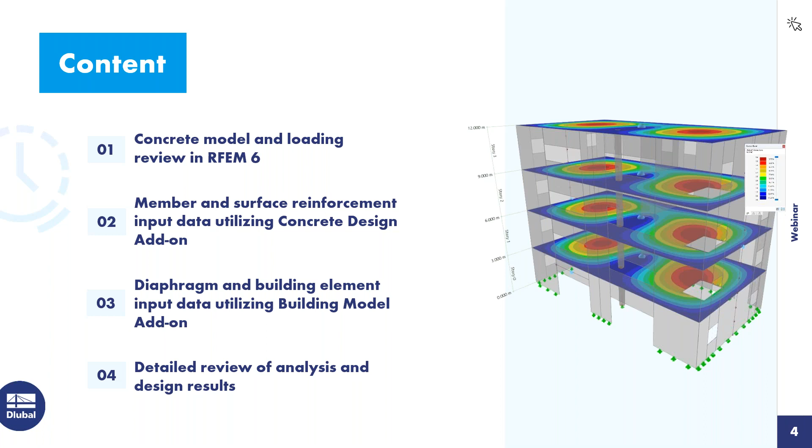We'll also be taking advantage of the new add-on within RFEM 6 called the building model. So this allows us to define building-specific elements such as diaphragms, spandrels, and shear walls. And finally, throughout the presentation, we will be running both the analysis and design and taking a look at the results in more detail. So we'll immediately begin within our main program, RFEM 6 here.

As you can see, I've taken the liberty to already model our concrete structure. But if we visit our base data by right-clicking on the model name, when you begin a new file, you will give it a model name. The type of model will be in a 3D environment, for example, today. And under the second tab are our various add-ons.

So RFEM is responsible for the full analysis of our structure. But if we wanted to take this a step further, and in particular today, to carry out the concrete design according to the CSA standard, then we would need to activate here that concrete design add-on.

Now, under this third tab, you can see here that we will generate the load combinations automatically according to the NBC that is selected here from our dropdown, but many other international standards are also available. We also will be utilizing the 2020 standard.

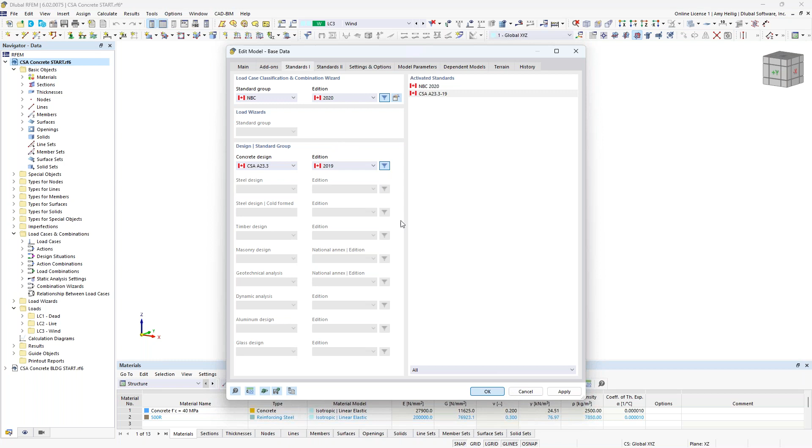As far as the concrete design, we will be carrying out the design according to the CSA A23.3-2019, but if you do have access to the concrete design add-on, you will also be able to run your design according to the ACI, the Eurocode, or other international standards offered. So once this information is input, we can go ahead and jump back into the main program RFEM here to review the model input data.

And we'll begin with our materials. So over on the left-hand side, you can see that the concrete compressive strength that I'll be utilizing for all of our elements today will be 40 MPa. If I double click on this material, I wanted to point out that the material type is set to concrete. And when we do this, we have an additional tab here to specify the creep and shrinkage properties of the material as well. So this will come into play a little bit later on with the long-term deflection.

Now for our example today, I'm going to leave these options turned off, but just keep this in mind for those specific concrete materials. I also have here defined the reinforcing steel material, 500R. This will come into play also later on as well with our reinforcement input data for our elements.

So in addition to the materials, we also have our cross sections. You can see that I actually only have one cross section defined for our members, which are the columns kind of running up through the center here of our structure. And double clicking on these particular members, you can see that the member type is set to beam. So this would be any standard beam or column element.

What also may be common with concrete design is the member type rib. So we can actually place a beam element below the depth of the slab here, integrate the internal forces to design this as a T-beam. Now, I won't be utilizing this type of member in today's example, but in the previously recorded webinar for ACI 318 design, I do go more into depth with the member type rib as well as the design, so you can refer to it there.

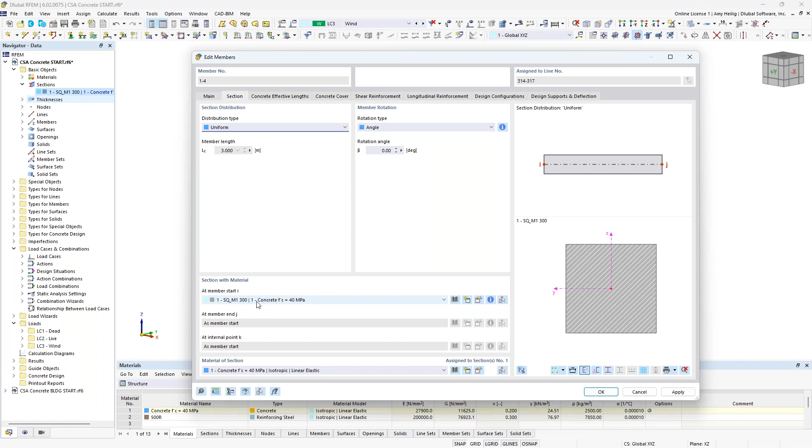For today, just using the standard beam type for our columns. We also have here the cross section and the material that are assigned to the member. You can see this is just a standard 300 millimeter by 300 millimeter with that same concrete compressive strength assigned as the material.

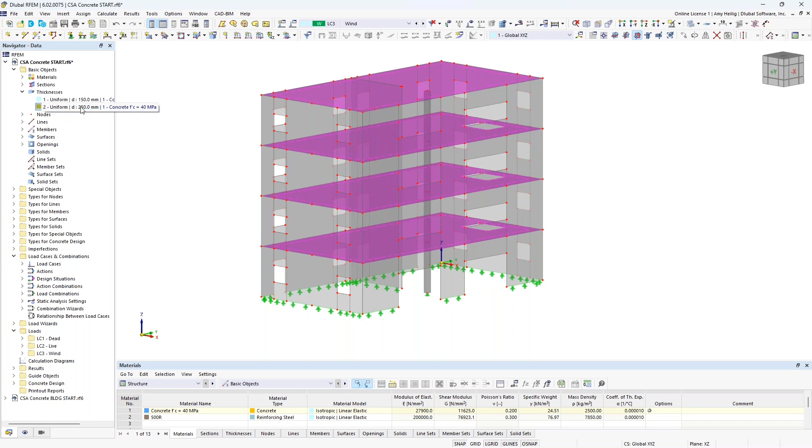As far as our surfaces, we have two different thicknesses assigned to these surface elements. For our walls, they are all utilizing a 150 millimeter thick definition type here. And then as far as our floor or slab elements, these are going to be slightly thicker at 250 millimeters.

With the modeling of our surfaces, you'll notice that all of these segments here for spandrels and shear walls are modeled as individual surface elements. This gives a little bit better output when it comes to the building model that we'll visit later today in our example, but this is in contrast to modeling one continuous surface and inputting standard openings as you see up here in our toolbar.

So again, just a little bit better behavior when we're talking about the building model add-on, but we are working in the next several weeks to optimize this so that the building model can also handle standard surfaces with standard openings. But for today, just notice that all of these are individual surface elements that are modeled around the openings themselves.

And finally, you will see down here at the bottom our supports defined. So just a standard pin type application at the bottom of our 2D surfaces with a line support. This pin support will be applied at every FE mesh element at the base of these walls. We also have a single nodal support here at the base of our column.

So now that we have reviewed the general information for our model, I want to get into the loading. We'll go ahead and access our load cases and combinations dialog box. As you can see under the base data, we have the same information that we defined within the dialog box we previously saw, where we're going to generate those load combinations automatically according to the NBC 2020. When this checkbox is checked, we will generate those load combinations automatically. Alternatively, you can uncheck this option to manually generate the load combinations instead.

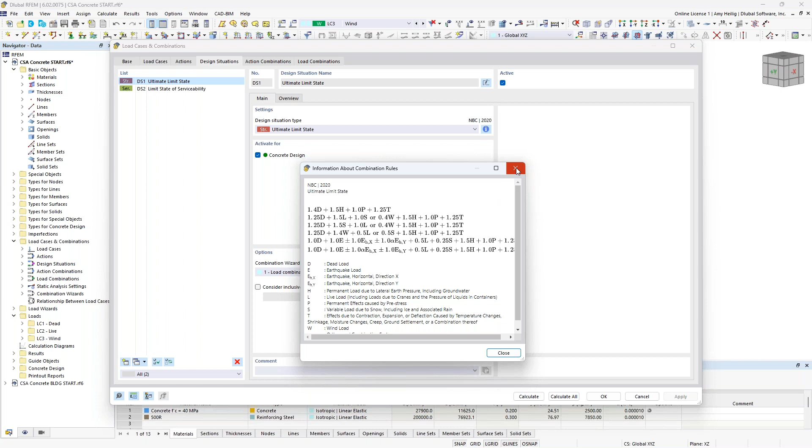A design situation is nothing more than grouping together the factored load combinations according to the NBC standard for this first design situation. We can review this data directly from the NBC standard with this info button. The unfactored load combinations are part of this second design situation. Again, we can reference the code here. All load combinations will be carried out according to a second order analysis.

And finally, we jump to our load combinations tab. You can see the individual load combinations listed out, and our factored load combinations in red belong to that first design situation, and our unfactored load combinations belong to the second serviceability design situation.

Now, before we move back to the RFEM model, I want to quickly explain how we can take into consideration the I-crack factor requirements from the CSA standard, in particular from clause 10.14.1.2. This is a requirement from the standard that we apply this crack factor to the stiffness of our elements within our concrete model. The problem is that when we draw this model, this is not automatically taken into consideration. Rather, we need to give that definition type directly under the load cases and combinations.

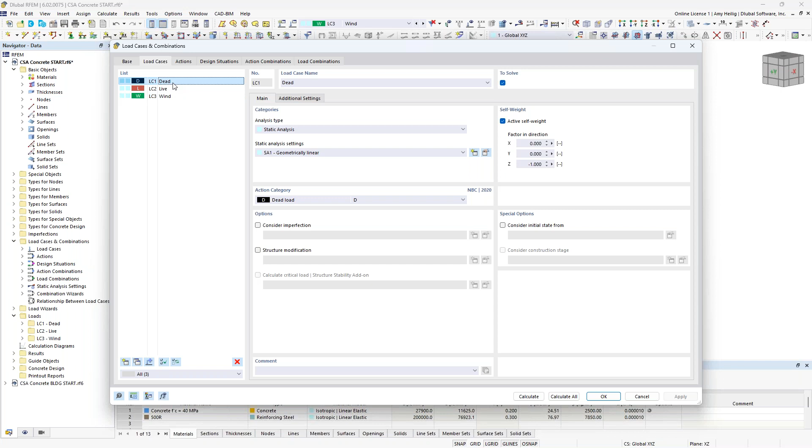So we'll begin back here under the load cases where we have the structure modification checkbox. What I'm going to do is create a new definition type for both our members and our surfaces. Now we get two additional tabs up here at the top. You'll notice under the member modification, I want to create a new definition type here.

And we have an additional drop-down box where we can directly select the CSA A23.3. And with this, we're going to refer directly to table 10.14.1.2. And we have 2 different component types, columns and beams. Well, for today's example, we only have columns available in the model. So the I crack factor directly from the CSA standard, as you can see here for bending stiffness, will be

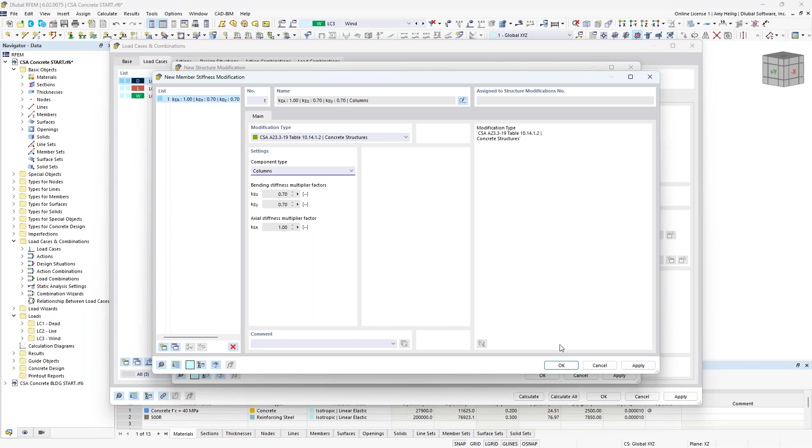applied to those members. So once we create the definition type, I do need to graphically select the members here that I would like to apply these to. So I'm just going to choose the 4 column elements here, and you can see the numbers 1 through 4 are now populated within this table.

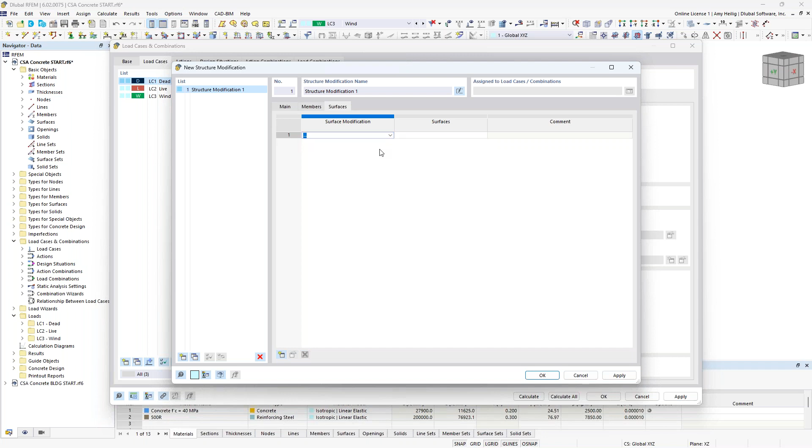We do the exact same thing with our surfaces tab. I use my drop-down box here to create a new stiffness modification. I utilize my drop-down box here to yet again select the CSA standard. And under the component types, we have 3 different options, and we'll begin with the walls uncracked. So we have the relevant I crack factor that will be applied to our 2D surfaces for our wall elements in bending and torsion. I click OK, and now I need to graphically select the wall elements.

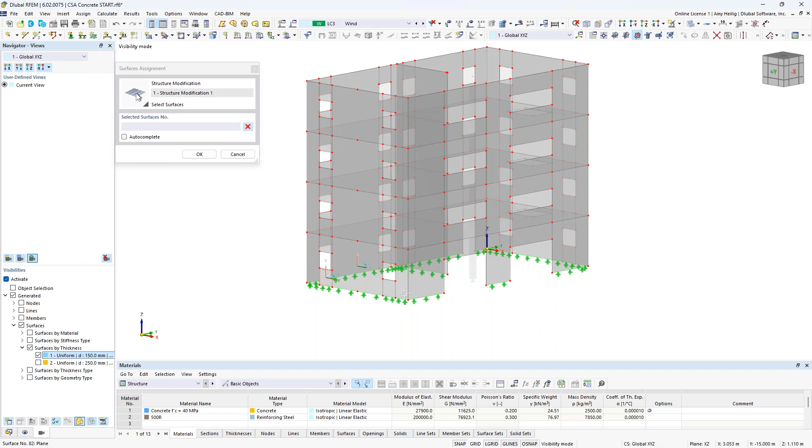I could individually select these or use my selection box graphically, but another easy method is to take advantage of the navigator view options here, where you can see that we can select various elements. And we'll begin with our surfaces, where I can select all surfaces graphically by their thickness. So I can select all surfaces that are 150 millimeters thick, which will essentially be all of my wall elements. I graphically select them, I click OK, and now those values are input into this table.

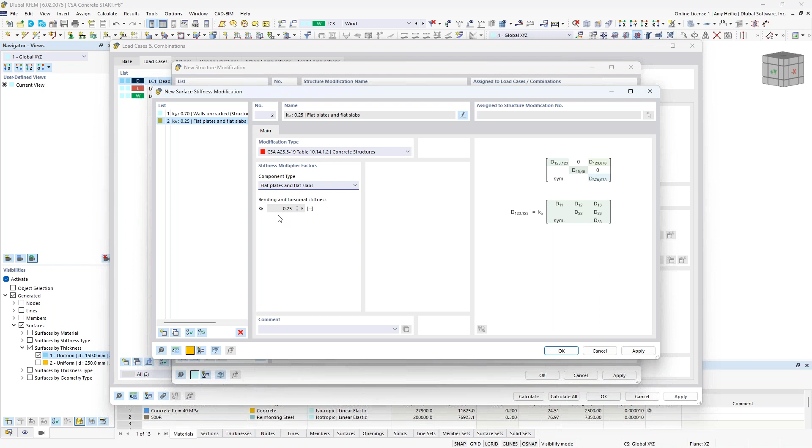Now we lastly need to create one more stiffness modification. We're going to use our drop-down for the CSA standard to select flat plates and flat slabs. The I crack factor is updated from the code to 0.25. I click OK, and now I need to graphically select the members that this will be applied to. So I'm going to modify my views here to the surfaces that are 250 millimeters thick, which are all of my floor slabs. I select those, I click OK, and now this information is complete.

So now that we have this structure modification definition, we want to apply this to the additional load cases here. So I can select both with my shift key and simply activate this modification yet again. But it's not enough to only apply it to the load cases. We also need to apply it to our load combinations. The easiest way to do this is to go to the design situations themselves.

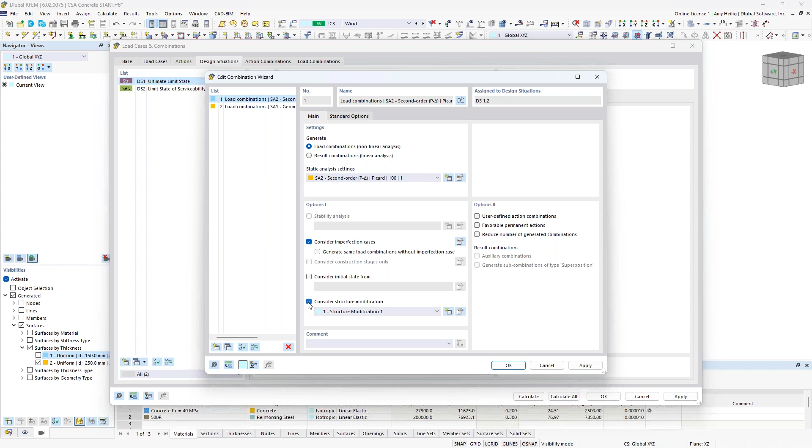And I had mentioned how we're automatically running a second order analysis with the combination wizard settings down here at the bottom. Well, if we go into the detail settings for this, we also have that exact same checkbox that we can turn on here for the design situation, which will in turn affect the load combinations. But I'd really like to apply this I crack factor only to my factored load combinations for the ultimate limit state. For my serviceability, I really don't want to apply the I crack factors.

Instead, what we refer to for topics like deflections under serviceability is the effective moment of inertia. And this is called out in clause 9.8.2.3 within the CSA standard. Well, when you do the design within the concrete design add-on, the effective moment of inertia will automatically be calculated. So I want to turn off the I crack factors for my unfactored load combinations. A very easy way to do this is to make a copy of my existing definition type and to simply turn that off with the checkbox option.

So now with my factored load combinations, I leave this with my first definition type, but for my unfactored, I'm going to use my drop-down box to select that third definition type. If we jump to the load combinations, we now see our factored load combinations here with the structure modification turned on, and our unfactored load combinations will have this option turned off.

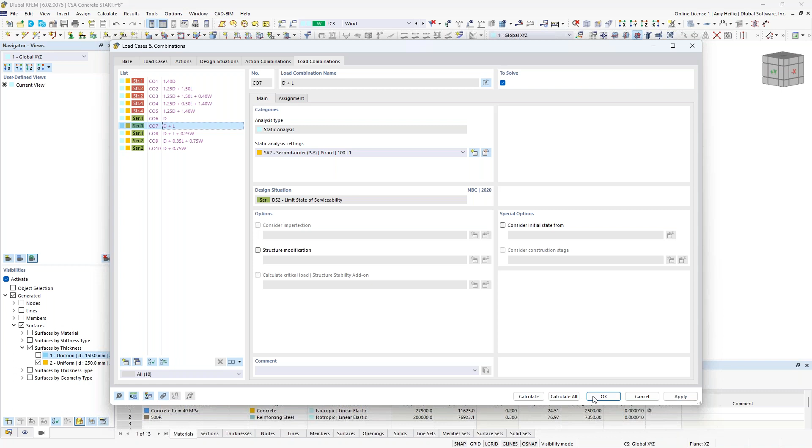Okay, so now that we are complete with the load cases, the load combinations, we've applied the I crack factor requirements from the code, I want to go back to the RFEM model here just to take a look at the display of our loads. So again, very simple application for today. For our dead load, you'll notice here that I just have simple surface loads applied at each floor level of 3 kilonewtons per meter squared.

When we look at the live load, exact same concept, and you'll also see here that within RFEM 6, we can right click on these loads and decrease the size of them graphically with this slider tool. But I've essentially applied these live loads at the interior floors only.

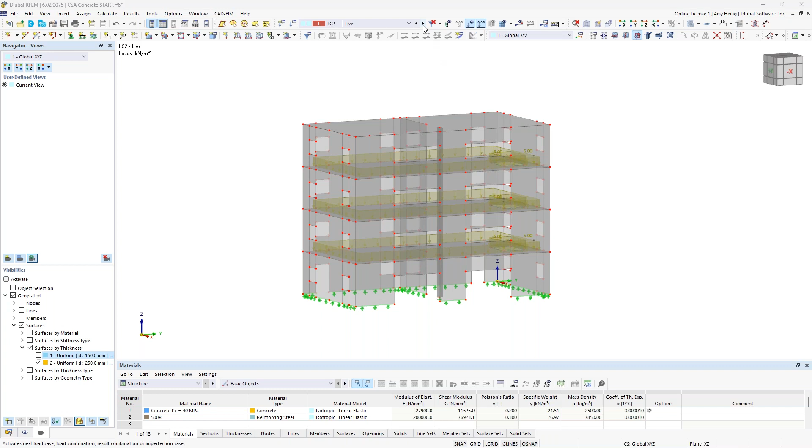And finally, we also have here a wind load. Again, very basic loading application for today. We have 2 kilonewtons per meter squared in the global X direction, and then 1 kilonewton per meter squared as a suction force on the other side. I recognize realistically, we'd probably have additional suction forces on the roof, and we'd probably also want to consider these openings and apply them as line loads around the edges of our door and window openings.

But for today, just sticking with this simple application. Now that we have our 3 load cases defined with the loading applied to this structure, we can jump down to any one of these load combinations and cycle through them to see the loads applied on the structure simultaneously, taking into consideration the load factors as well.

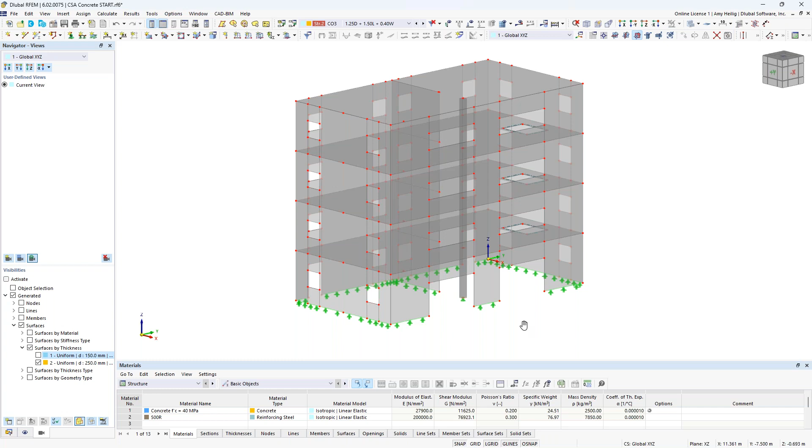All right, so now we have reviewed the loading. We are finally ready to input in the reinforcement for some of our elements specific to the CSA standard. We will begin here with the reinforcement input of our columns.

So I'll go ahead and hold down my control key to create a user-defined visibility for only these members. When I double click on all 4 of members, numbers 1 through 4, you'll notice that we have the design properties turned on here. This is just telling the program that not only do we want to carry out the analysis, but we want to take it a step further to actually design these in the concrete design add-on. We have all the available tabs up here at the top, but notice when I uncheck these, all of these tabs actually disappear, just telling the program I only want to carry out the analysis with the concrete material, no reinforcement input.

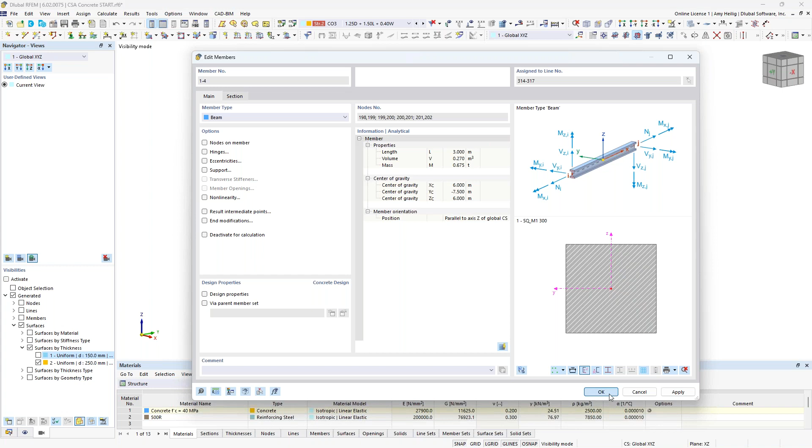So what we, of course, will do is input the reinforcement here, but assuming that we want to have the same reinforcement for all of these columns at all levels, I certainly could go into each individual member and input in this reinforcement, but alternatively, we can take advantage of what we call the member representative.

So I'm going to access that same base data dialog box by right-clicking on the model name and jumping to the settings and options where I can turn on the member representatives checkbox. What this is going to do is group together members that are really similar or identical in most ways, including materials, cross sections, the length. So now when I click OK, what you'll notice here is that I get a new option within my navigator called Member Representative, and this will group together these 4 identical members.

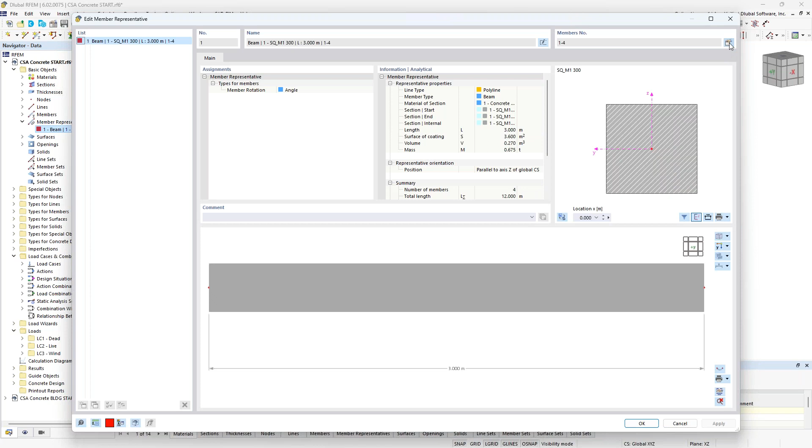Double clicking on the member representative to open up this dialog box, you can see that it includes members 1 through 4. And if I go into the edit members setting up here in the upper right corner, we're back into the same dialog box. I can turn on the design properties for those additional tabs here, but again, instead of individually inputting in this reinforcement, I'm going to click OK, and all of these exact same tabs will be available in the member representative.

So this way, if I need to make any modifications to this reinforcement, I can do it through the member representative, which will in turn make those same changes to members 1 through 4. So we'll begin by working through these tabs up here at the top. The first one, the concrete effective lengths.

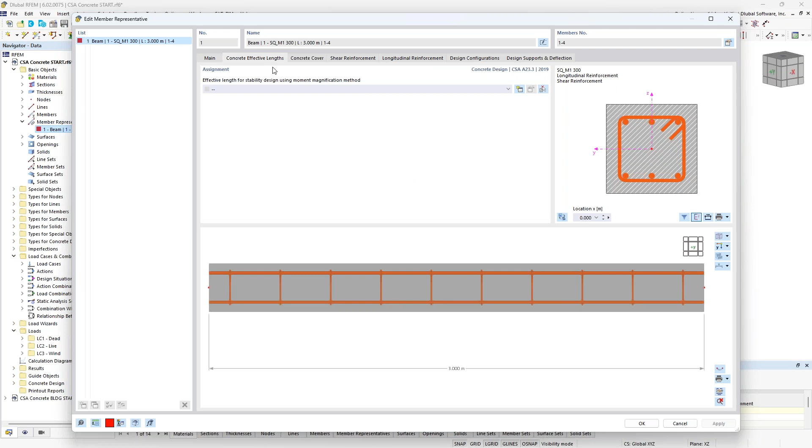This is only if you're going to carry out the moment magnification method, and because we are running a second order analysis, this is not required. Moment magnification is required for first order analysis. So essentially, we don't need to do anything within this particular tab, and we can leave it empty and move on to the next. We have here the concrete cover.

So I'm going to specify 30 millimeters for my concrete cover for these columns. Under the shear reinforcement, this is where I'm going to specify my stirrups.

So under the first dropdown, I choose the stirrup type, and I'm going to go ahead and choose the default first option here. The material is also set. I already have this reinforcing material defined within the model, so I can just simply select it from my drop-down box. But if we did not have that reinforcing material available to us, we can click on the 3 dots here.

This will bring up our material dialog box where we can access our material database. Utilizing the filters over on the left, we can filter to Canada, filter to the material type set to reinforcing steel, the CSA standard, and then we have these available reinforcement materials from the library directly.

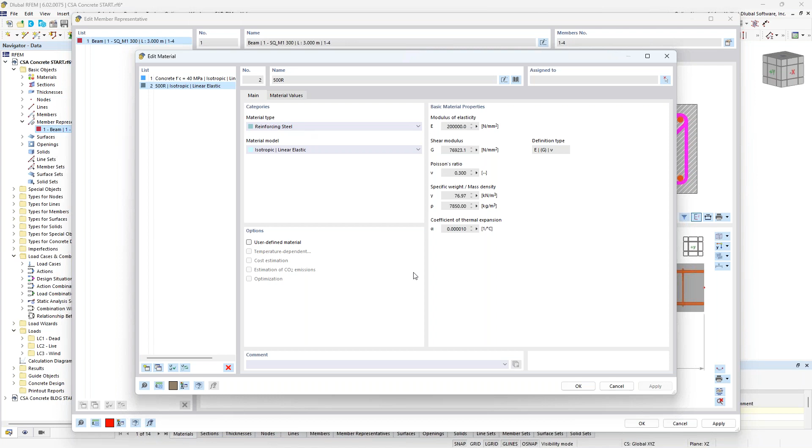If we choose one of these reinforcement materials and we want to make some modifications, we can always choose the user-defined material option checkbox that will allow us to make modifications for a user-defined material. For today, we already have this 500R defined for my reinforcing steel, so we'll go ahead and utilize that.

Now I want to select within this drop-down box the bar diameter, so we'll go ahead and select the number 10s here that are available with this first option. I specify the stirrup spacing such as 0.3 meters, and the number of bars will be set to 10. Now notice that the graphical display down here at the bottom will go ahead and update as I input in this information.

Now you do not have to set the same uniform spacing and type of rebar across the entire member length. It might be very common for beams, for example, to have maybe more shear reinforcement at the member ends versus the middle. We can simply create new definition types with this button here, and then we can specify exactly the start and the end of the shear reinforcement definition. But for today, for our column, we're leaving this as uniform spacing with those number 10 bars.

Moving on to longitudinal reinforcement. You can see by default, the program has set this to symmetrical, which might be more common for a beam. For a column, we want to choose the drop-down option, uniformly surrounding.

That 500R material will be selected here. We have a couple checkboxes to place the longitudinal reinforcement in the corners. This is really more applicable for T-beams. You can see that the reinforcement is already placed in the corners, so nothing to do with both of these checkboxes. We specify the number of bars, 4, and then we will also set the bar size within our dropdown.

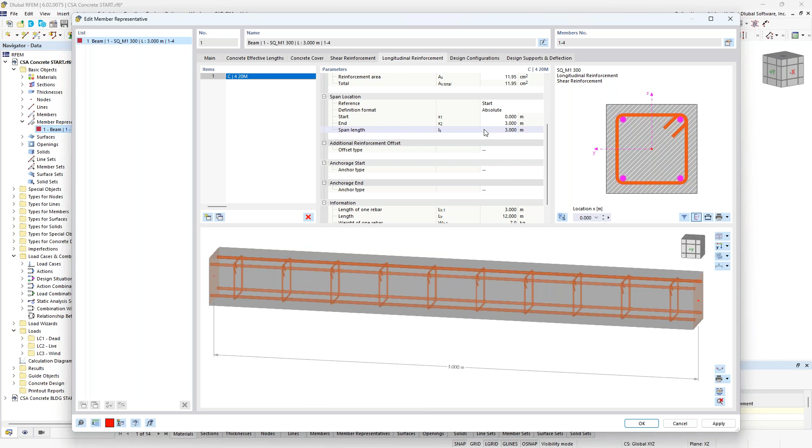So now we have finished the reinforcement input. We jump now to the design configurations tab, and we have here 2 configurations. The first is the ultimate.

So we go ahead and take a look at the default settings here. This is going to be information that is specific to the ultimate limit state design for our members. You can see here all of the various options that we can turn on or off, or maybe we want to change values, or we want to choose a different method, whatever it may be. But also all of the code references for the most part are listed out here, so you'll easily be able to refer to the code to understand which setting belongs to which requirement here.

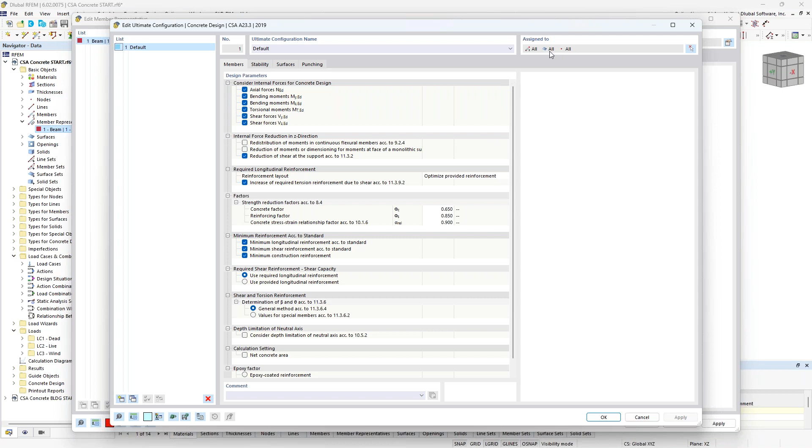We can also create additional configuration settings for different members. So currently we only have one definition type, but we can create a second definition type and assign it to different members and surfaces and so on.

Same concept for serviceability. If we look at the detail settings here for the default for the SLS design, we're going to see information specific to serviceability, such as the crack control according to clause 10.6.1. We also will check deflections of the members. You can see here the limiting deflection ratio for members that are supported at both ends versus a cantilever member.

We also have here the calculation of time-dependent deflections. So the default option here is to refer to clause 9.8.2.5, where we input in the duration of the load. And what this will simply do is to apply a deflection multiplier for the sustained loads to the instantaneous deflection. Well, this is certainly a very simple application here.

Alternatively, if we want to take into consideration creep and shrinkage from those material properties that I mentioned at the beginning of this example, this is going to be certainly a more theoretical and exact approach for creep and shrinkage. For this, we're going to take the approach from the ACI 435, as well as the same approach that's followed within the Eurocode, as there really is no specific requirements from the CSA on this topic. Now for today, we'll just leave this as the simplified time-dependent factor here.

So these are the various settings then with the serviceability and ultimate configuration settings that we'll utilize within that concrete design add-on. And finally, we have here the design supports and deflection. So when I don't do anything within this particular tab, the program is going to assume that this member is supported at the member start and the member end at exactly these points shown here.

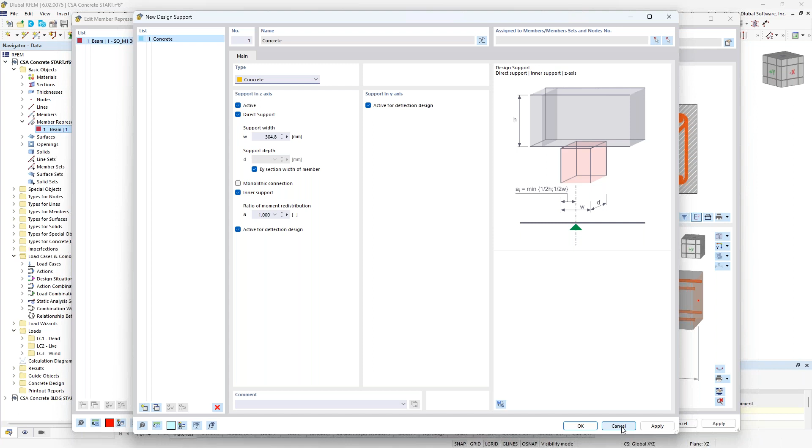So maybe not so applicable here with our columns. We'll just go ahead and leave this as default, where all forces are taken directly at the member ends.

Now that this information is input within our member representative, what you would typically see is the reinforcement shown here graphically. I'll turn this into wireframe view. You can see here the longitudinal and the shear reinforcement shown.

Now that we have the reinforcement for our concrete members, let's go ahead and cancel out this visibility and move on to the reinforcement of our slab.

I will begin with the slab shown here at the first floor, and we go ahead and double click on this element. You'll notice we have the exact same checkbox available here for our 2D surface elements. This is telling the program not only to carry out the analysis, but also to perform the design within the concrete design add-on.

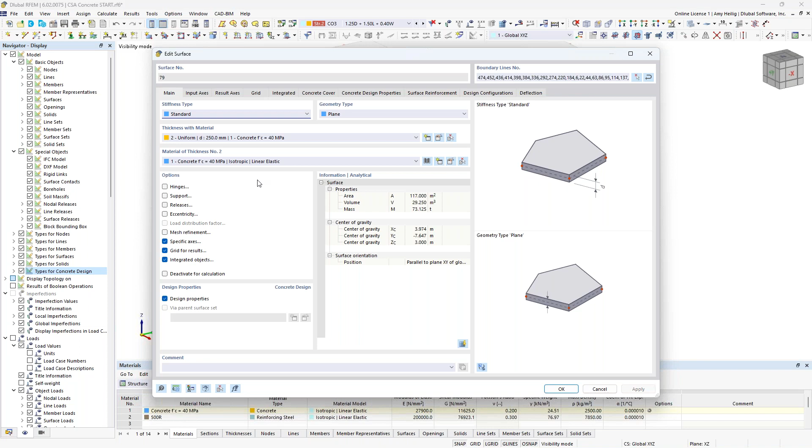So we will move through these tabs. We will start with the concrete cover, where we're going to increase the cover distance here to 40 millimeters at the slab top and the bottom.

The concrete design properties simply tell the program that when I define my first longitudinal reinforcement, which direction should this be related to in terms of the surface's local axes. The default here is the local x-axis.

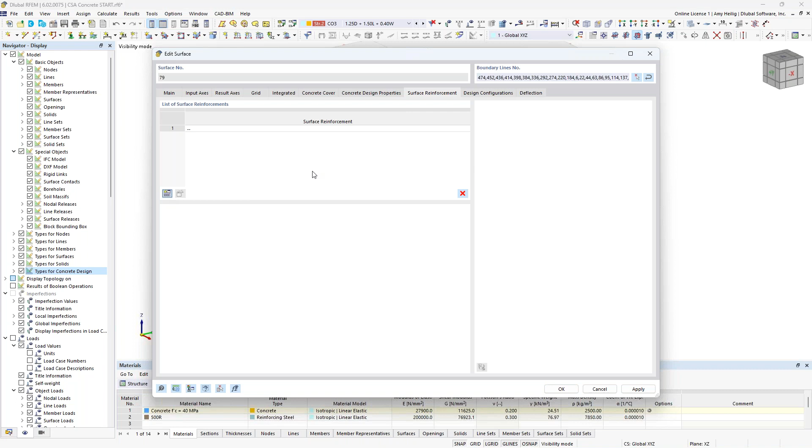Once I get into the surface reinforcement, what we can do is create a new definition type. This dialog box pops up with our first dropdown asking where we want to place this reinforcement on the surface - do we want to apply it to the entire surface or just particular areas?

For our first definition, we want to apply this to the entire surface. The second dropdown is our material, again that 500R we already have defined within the model. The reinforcement type can be a welded wire mesh, a rebar, or if we're placing shear reinforcement for one-way shear design, we can specify stirrups.

We will go ahead and utilize the rebar option for today, and in my dropdown I can select the number 15 bars here, and my spacing is going to be at 0.15 meters. So this is the longitudinal reinforcement now in the local x-axis of my surface.

But I'm likely interested in placing also transverse reinforcement in the local Y direction. We can easily do this by checking the checkbox here at the bottom. I select my bar diameter here with 15M, and then my spacing will also be 0.15 meters. Now we have this longitudinal reinforcement in both directions for both the top and bottom across the entire surface.

Now, if we're also interested in placing reinforcement where locations such as columns are framing into the slab or walls, we can simply create a new definition type here.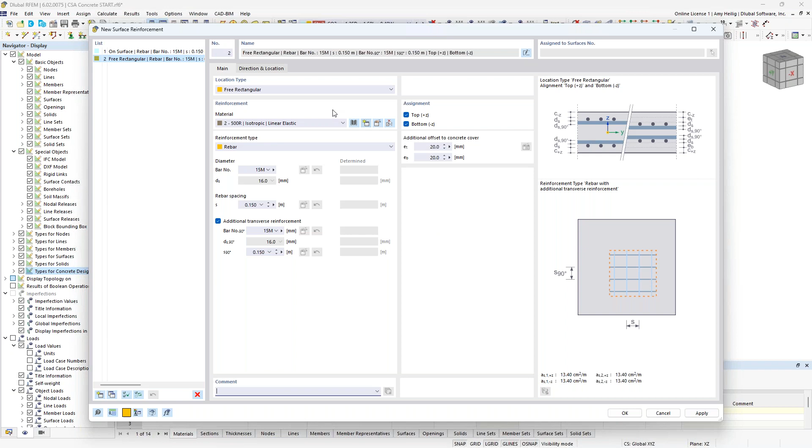We also want transverse reinforcement, same concept here, spacing at 0.15. I could even add in an additional offset here to offset from my number 15 bars in this first definition type.

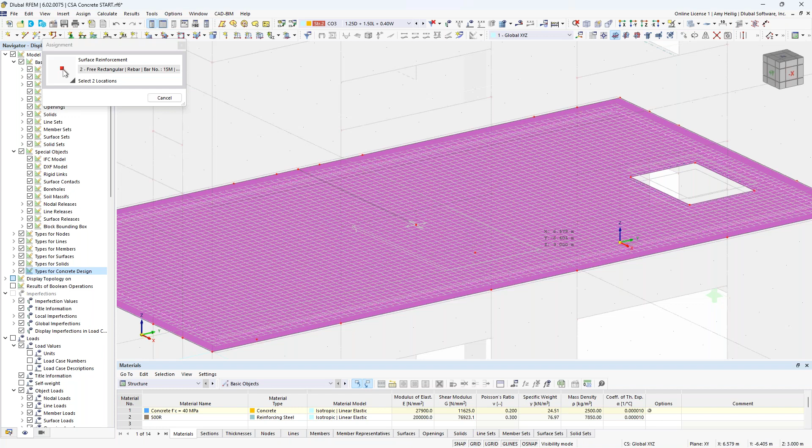But under this second tab, this is where we can graphically place this reinforcement in certain areas of the surface. If I turn on my grid settings, just to provide a little additional guidance, I can then click on 2 points - maybe over my column and my wall at the center of the slab where I'd like to apply this additional reinforcement.

The coordinate points are automatically populated here, and now we're taking into consideration both of these reinforcement definition types. What else has been recently released within RFEM 6 is this new auto function.

So if we would prefer the program to optimize the bar size for us based on the required reinforcement from the analysis and design, we can choose the auto function. When we choose this, a dialog box pops up that says what minimum size do we want, what maximum size, and then again, the program will optimize that bar diameter for us.

In addition to the auto function for the bar number, we also have the auto function for the spacing. So when we choose the auto function here, we specify the minimum spacing, the maximum spacing, and the increment. And again, the program will optimize this based on our required reinforcement from the analysis.

Now, it should be known that you cannot use the auto function for both the bar number as well as a rebar spacing. You kind of need to choose one or the other here, but it also can be applied to the transverse reinforcement. Now, for today, I'm going to totally delete this definition type, and we will just utilize this uniform longitudinal reinforcement throughout the entire surface.

Also, this surface definition can be applied to more than one surface. So if I want to use the same reinforcement at every single floor level for my floor slabs, I can easily apply this same definition type to multiple surfaces. This way, if I need to make any modifications, I go back in to edit only one definition type here, which will then affect all of my surfaces.

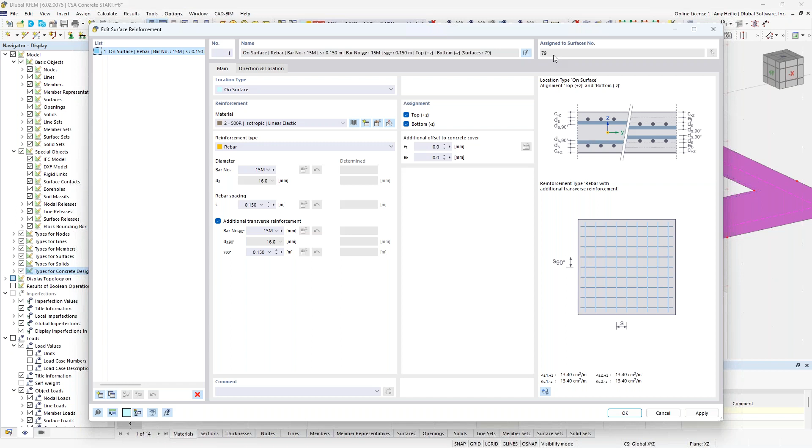So now that we have this specified here, what I'd like to do is to go to the design configurations. Very similar concept to what we saw with our members. For the ULS design, instead of the members tab, we go to the surfaces tab. Again, just various options for the ULS design specific to our 2D surfaces.

Maybe one important topic is we would want to maybe change this, whether we are designing a plate or a flat slab versus a wall element for maximum longitudinal reinforcement. Again, we can create multiple definition types to assign them to our walls versus our floor slabs.

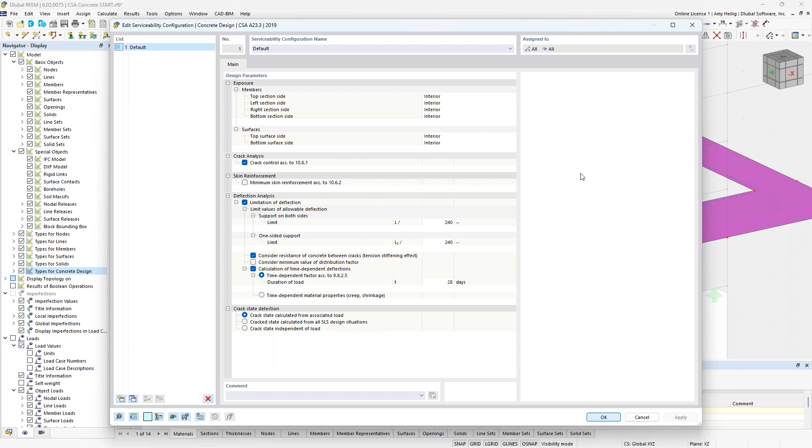So once this information is input, we'll check out the serviceability. This actually is identical to the configurations for our members as well. We're also going to check deflections here for our surfaces. Again, create multiple definition types if you'd like to have maybe different limiting deflection ratios for members versus surfaces.

And finally, the deflection tab. So this allows me to specify if this surface is supported at both ends or is it a cantilever. We need to know this information for the limiting deflection ratio.

All right, so now that this input information is complete, what we should see here then, if I cancel out of my visibility, is the reinforcement shown graphically for our surface as well. So this is going to be that longitudinal reinforcement at both the top and the bottom shown graphically. If this does seem to get in your way graphically, just go ahead and navigate to the Navigator Display tab here, and up at the very top, we can turn off the types for concrete design.

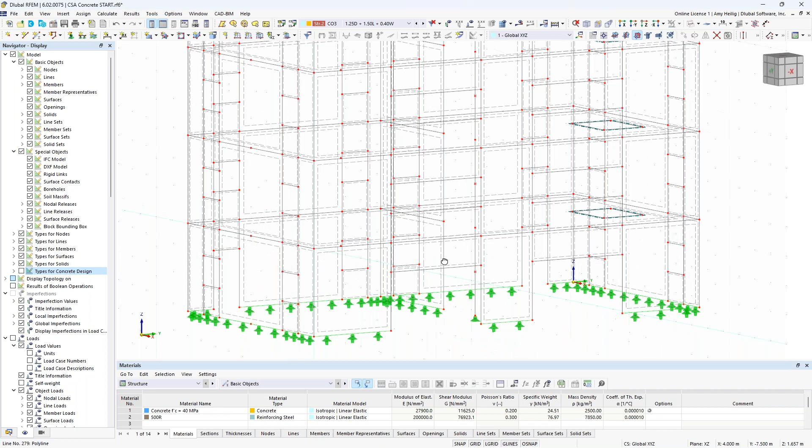So the final topic here is going to be punching shear. This is also a new feature that we have recently released within RFEM 6 for both the ACI and the CSA standard, is the ability to check punching shear. Well, when we look at this column framing up into this slab, this is probably an area that we would want to carry out that design at this particular node, but we also can check punching shear at wall ends as well.

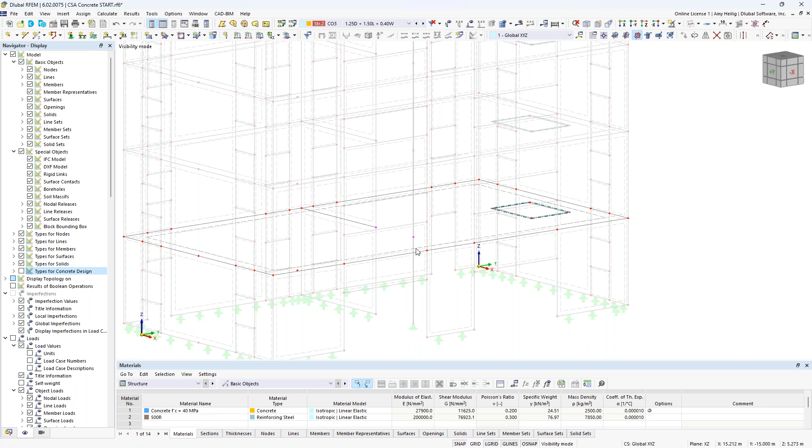So holding down my control key, I'm going to select both of these nodes here and double click on them. We have an additional checkbox down at the bottom to turn on the punching design, again, specific to that concrete design add-on. And we now get an additional tab here for the ultimate configurations only for punching shear. So we've already visited members and surfaces, but now we have this fourth tab specific to the punching shear design for the CSA standard.

Now, it should be known that currently the punching shear is carried out with no reinforcement considered. We do plan to add in the near future the ability to specify the additional shear reinforcement for two-way shear design or punching shear design, but currently all checks are carried out with the unreinforced section.

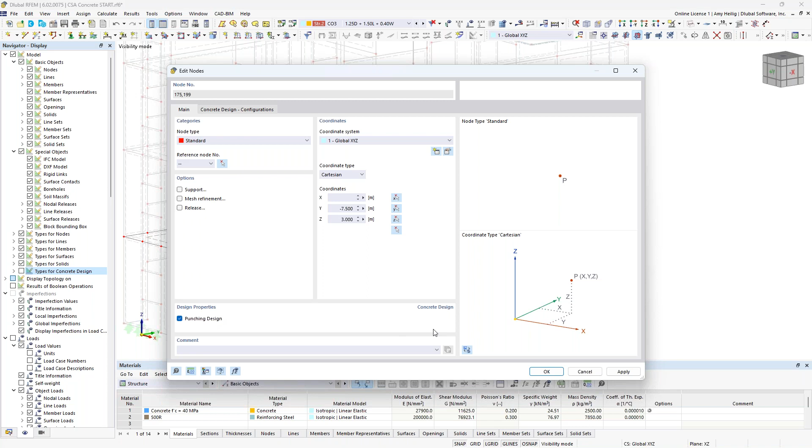So now that we have specified here this additional checkbox for these two particular nodes, we are ready to visit the concrete design add-on input data within the table here. So canceling out of this visibility mode, let us choose the concrete design here within our drop-down box. And this is only available because, again, I've activated that concrete design back in the base data. Well, under the design situations here, remember I said design situations are always needed to carry out the design within these add-ons, and here they are listed again.

So we have our ultimate limit state design situation that we want to tell the program to go ahead and carry out the ultimate limit state type for all of my elements that I plan to design. We also have our serviceability or unfactored load combinations here with this second design situation type, and we want to modify this here to the serviceability limit state.

Now you'll also notice within this dropdown we do have the earthquake limit state. So currently we can carry out the reinforcement detailing requirements for seismic according to the CSA standard. So keep that into consideration that it is the detailing only checks right now. Now we continue to move forward with development to do additional seismic checks in the future.

If you are interested though for the reinforcement detailing for seismic, you would just simply go back to our load cases and combinations. You can make a copy of our ultimate limit state design situation. We would have a third line here where we can now relate that to the earthquake limit state type.

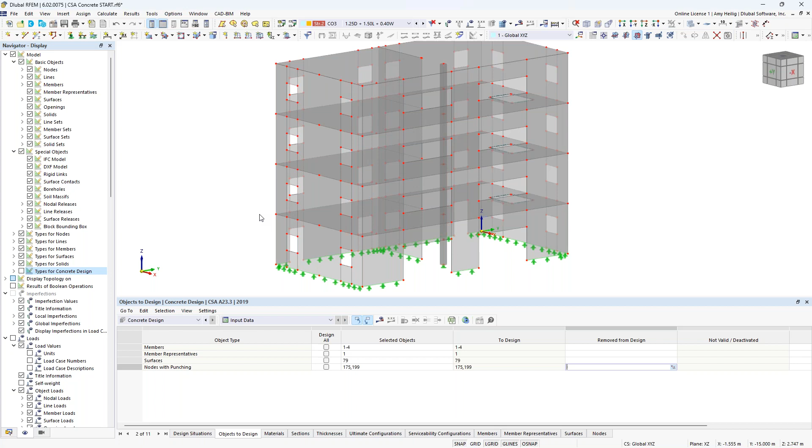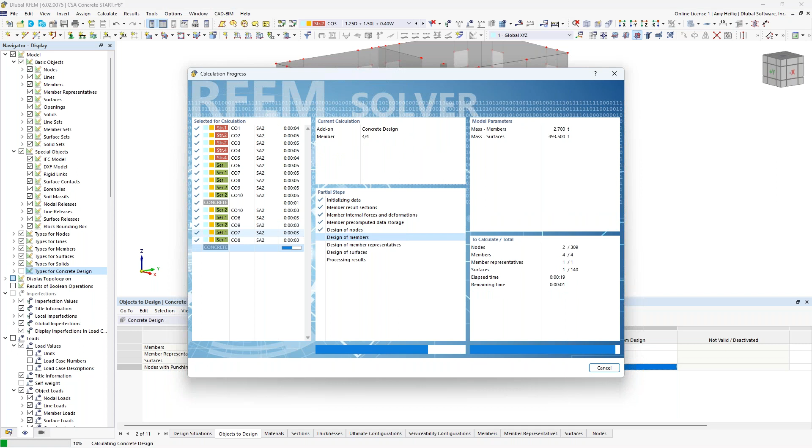So now that we have input in all of this information, we're ready to run our calculation. And I do so directly within the table options. And you can see that the program will now cycle through all of my load combinations here for the analysis portion, taking into account topics like the I-crack factor. You'll also see here that we rerun the serviceability load combinations, and this all just relates to that effective moment of inertia that we need to recalculate to determine the deflection checks within the concrete design specifically. And finally, we carry out all of the additional ULS and SLS requirements to give us the design check ratios for all of these elements we have considered.

Now, before I get into the concrete design, let us back up a step just to view the static analysis that's available within our Navigator results option. So nothing to do with design right now, but you can see here that we're currently looking at the global deformations, and I can cycle through these different load combinations to see the deformation of the structure.

But we're also likely interested in topics like the member internal forces. Now, currently, I only have one set of members here for my columns, but we can view the internal forces graphically, such as the axial forces or the shear forces, bending moments. And all of this information is also available in table format as well. If we go to results by member, we can view that information rather than just graphically, but also in table format.

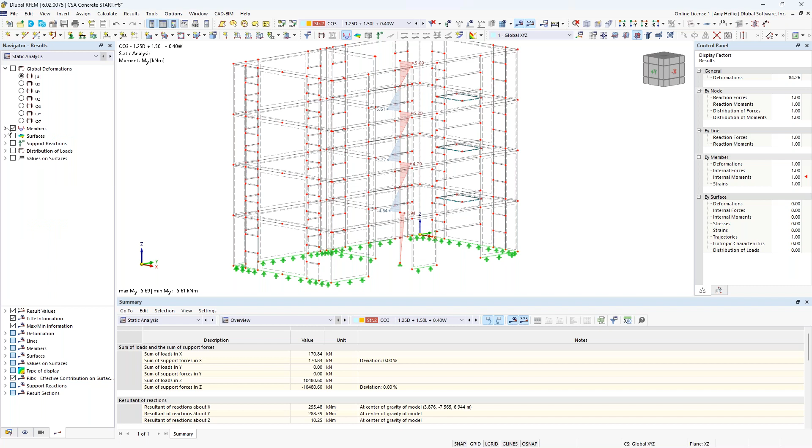It's also important to look at the surfaces. So what I want to do here is maybe we'll create a user-defined visibility for only that particular surface that we're designing. And we activate here the surface results, such as the basic internal forces. We have here MX, we have MY, MXY. All of this internal force information is used in the design of this slab within the concrete design add-on.

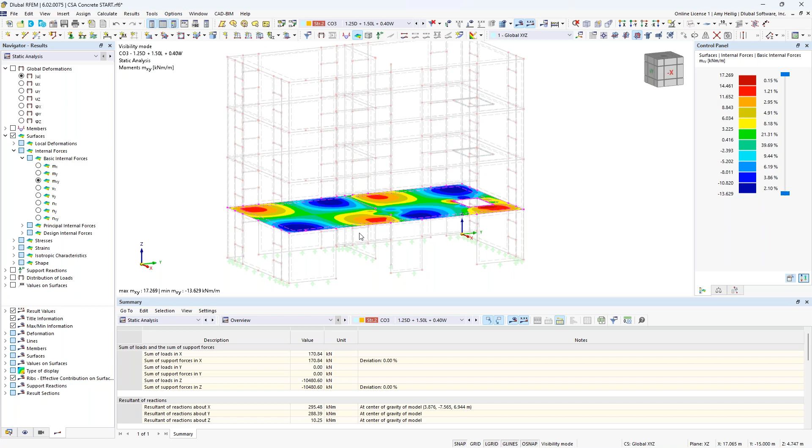What I want you to take note of is these membrane forces or in-plane forces, NX and NY. So you'll see here that we clearly have some high values for the in-plane forces of this particular slab. Keep this in mind because this topic will certainly change when we get to the building model add-on and we define diaphragms instead.

So now that we have quickly covered the output here from the analysis, we want to take a look at the actual design according to the CSA standard. So under the concrete design here within the table, we're just getting a quick overview of maybe where we have some problem areas.

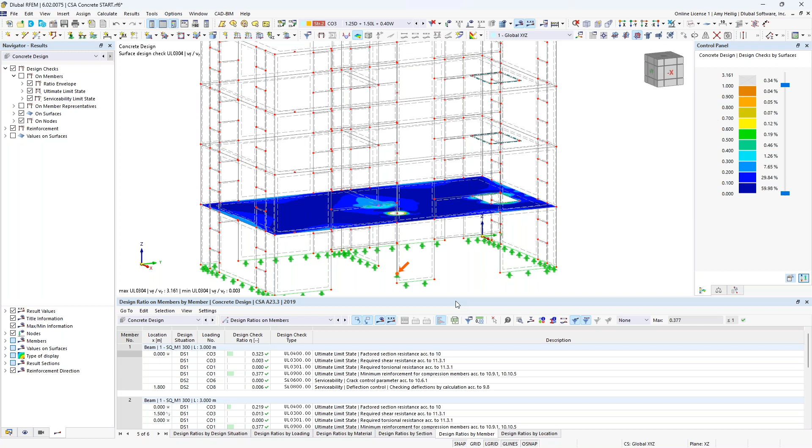But before we address these, which are mainly located in our surface, let us take a look at the design ratios on the members. And I can graphically turn on the design ratios of the members here so that we can see, again, specific to the concrete design add-on. So I'm currently looking at these design ratios tab here for each of the members, and notice that everything is synced up within the table as well as the graphical view, so we can view the design checks for the columns at each floor. And we have for each column the ULS checks and SLS checks.

If we wanted to take a look at the design check details for each one of these particular checks, we can access this here within our table. It's called Design Check Details, and this is new within RFEM 6. What this allows us to do is to view the equations line by line, along with the variables, the code references, everything is given here so that we can show you how the program has determined this specific design ratio for this ultimate limit state check.

We can add this information to the printout report. These calculations and formulas will update in real time in the printout report if we make any modifications to the model. Additionally, we can use our drop-down box here to switch to a different design check if we'd like to see those formulas listed out here. We can expand out our table if we're interested in seeing some of the analysis information or variables that again go into this design check details.

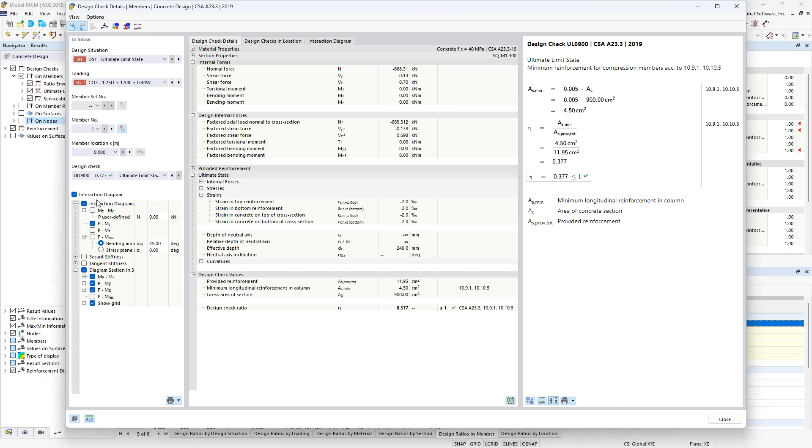Also new within RFEM 6 that we previously did not have in RFEM 5 is the interaction diagram. So we can activate this here and we get a third tab. And here we will see the 3D interaction diagram for our particular column under the applied loading. We can add this as a graphic to our printout report, but we also see the values here in table format. Additionally, we can see exactly which point we fall under within this moment interaction diagram under the applied loading for this particular scenario. So very powerful in the sense of all of the detail output information that we have added in RFEM 6 for the concrete member design.

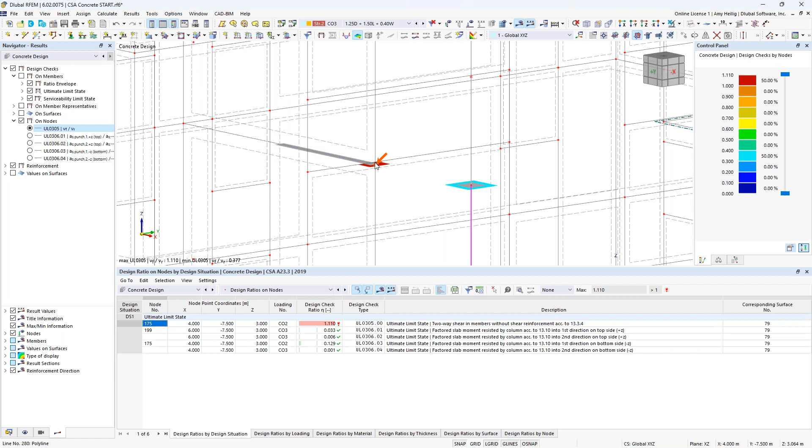So in addition to the design of the members, we also have here the design ratios on the nodes for our punching shear. So we'll go ahead and turn on the graphical display of this. Maybe we turn off the members, and we can view here in a bit more detail in table format as well as graphically the punching shear. So as mentioned, this is always considering, at least at this point in time, the slab is unreinforced for additional shear reinforcement, but this allows us just to view, okay, is the slab adequate without that shear reinforcement, or do we need to additionally take that into consideration? Looks like we're a little bit overstressed here with the shear design check for punching shear at this particular wall end.

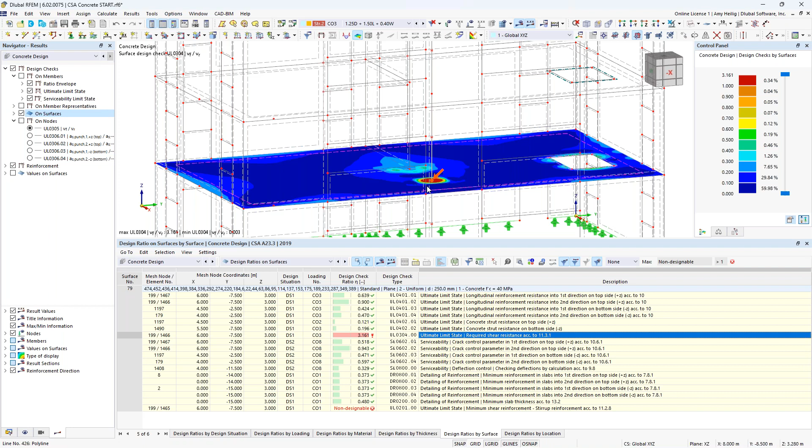And finally, we want to take a look at the design ratios of the surface. So we see this in table format here, and I'll go ahead and turn on the design ratios of the surfaces graphically. Well, a lot of these checks appear to be okay, but we certainly have some issues, especially when we're talking about shear checks at maybe where the column is framing in to the surface. So very high design check ratio here, over 3.0.

Well, the slight problem here is that, remember, we have this column framing into the beam here, and it's framing into this slab at this single FE mesh point here, this node shown graphically. And we know in reality, we're going to get better load distribution than what we can show in an FEA program where all loads are coming in at this single mesh point. So this is called a singularity. And this is not unique to RFEM, but all FEA programs deal with singularity.

So the question is, what tools do we have in the program to deal with singularities, especially with the concrete design, so that we're not over designing this structure, because in reality, again, we know we're going to get better load distribution. So let us go back to the basic model here, and I'll go ahead and create a user-defined visibility with only this surface. To address singularities, the first thing that we want to do is to double click on this node and to add in what we call a mesh refinement.

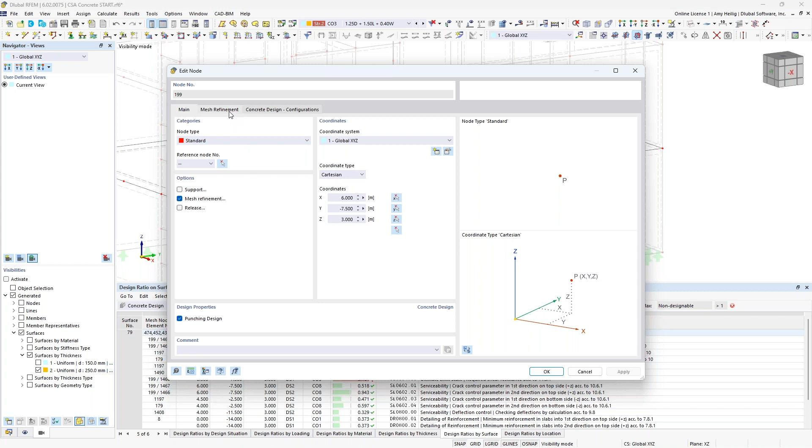So currently within the global model, we have a mesh setting of 0.5 meters. Well, a nodal mesh refinement here will allow me to create a new definition type where I can specify, for example, the radius of 1.5 meters, and to refine that FE mesh at 0.1 meters at the interior, and we'll transition to 0.3 meters at the exterior.

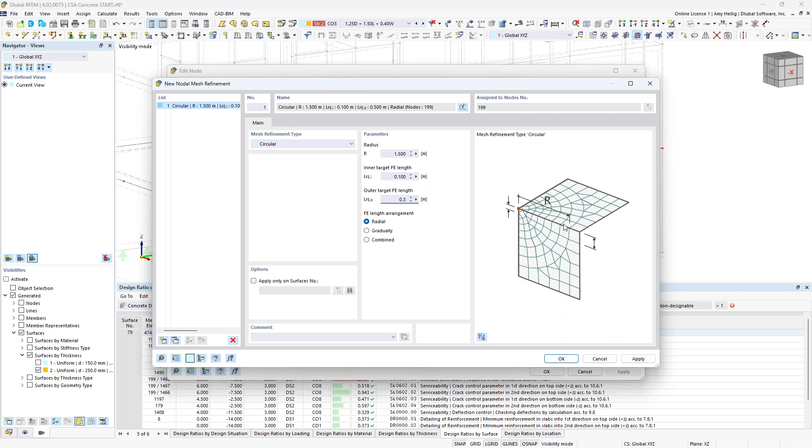So once we have this definition type set, we do need to clear out our results. We click OK, and now we see this additional symbol shown here graphically for that FE mesh refinement.

So after we have set the FE mesh refinement, there's also an additional element that we want to add here. And this is found under the Navigator Special Objects folder. We see Surface Results Adjustments. So we can right-click to create a new definition type. And what this will allow us to do is to actually average out the forces over a set area. So that way we can kind of smooth out those high peak forces.

We will specify this one as a rectangular shape with the dimensions set at 0.8 meters by 0.8 meters. I can graphically select this node here right where the column is framing into the slab. And I also want to select the surface that I would like to average out these internal forces. So surface number 79.

Now, a very common question is, well, what size do I set this average region or this surface result adjustment to? This is really up to the engineer's discretion. If you set this to something too large, then maybe we're not accurately capturing high internal forces here that really will occur. If you set it to something too small, then maybe we're over designing because we know in reality we're getting better load distribution. So for today's example, just a completely arbitrary value here of 0.8 by 0.8 meters.

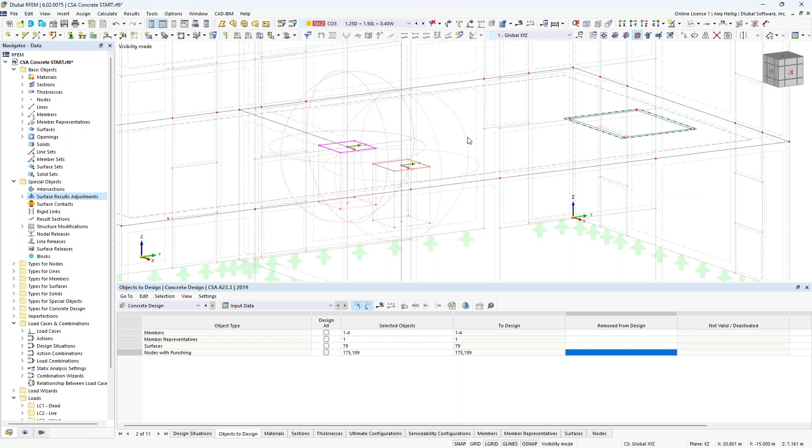So once we have applied the surface result adjustment and the FE mesh refinement, we're going to rerun the calculation here within the concrete design add-on. So because we made modifications to the mesh directly within the RFEM model, we do have to rerun all of the load combinations because inevitably we're going to get slightly different load distribution when we make modifications to those mesh settings. We'll also, yet again, cycle back through the serviceability load combinations here for that effective moment of inertia and deflections. And finally, we'll apply the code equations from the CSA standard.

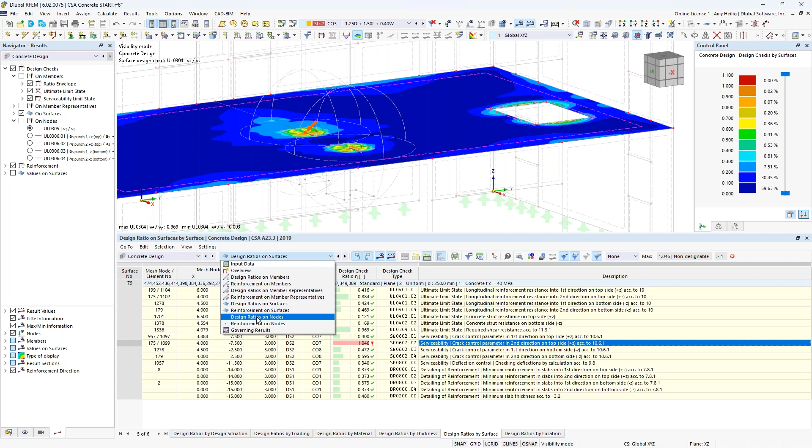So now that we have finished this calculation, let us jump to the design ratios on the surface. And I just want to point out that now a lot of these design ratios are below 1. We have one small issue here that's slightly above 1.0 with the serviceability crack control. But again, we've kind of smoothed out those high peak forces so we get much better results in addressing those singularities. The same concept is also applied here to the design ratios on the nodes. We can see that this value also dropped down as well.

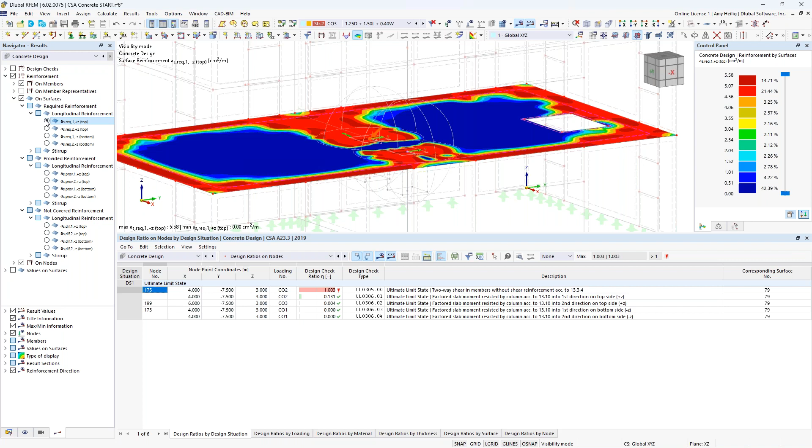The final thing just to show you within the graphical view is that currently we've been viewing everything based on the design check ratios, but keep in mind that we also have the reinforcement view here. And we can view the required reinforcement based on the analysis here in the longitudinal directions for both the top and the bottom. We can also view the provided reinforcement. So this is my number 15 bars at 0.15 meter spacing. This is uniform, so that's why we're seeing just one solid color here.

And then we have the not covered reinforcement. This is just the program simply looking at the required reinforcement, comparing it to the provided reinforcement. And if we are not meeting the criteria set forth by the analysis and design, we would see additional areas here in the slab where we would want to add more reinforcement, but it looks like it's adequate here for our example today.

Okay, so now that we have a general understanding here of the concrete design add-on, I am going to jump to an already saved model where we can touch on the building model. So I'm going to revisit the base data here. And by the way, this structure in the background is the exact same model that we have just been working with. The only change that I made here under the add-ons is I have now activated the building model. So what we're trying to do here is that RFEM is a general FEA program, meaning that any structure is possible to analyze and design.

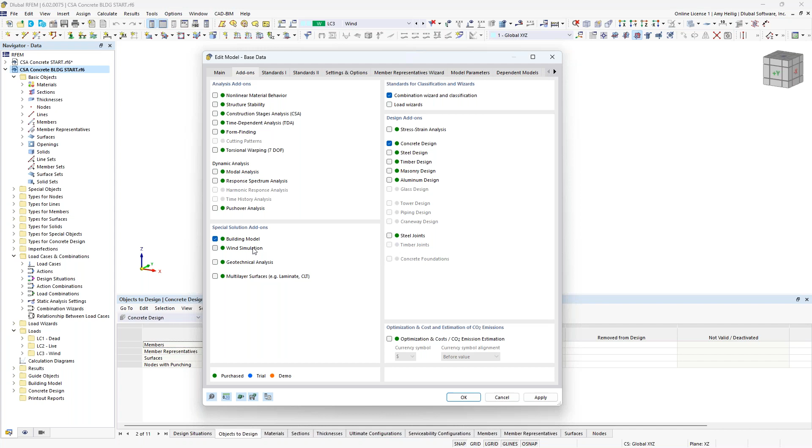We want to implement more building specific features into this general FEA program for, again, those building specific projects. So when we activate this add-on and we click OK, at first glance, it seems like not much is different here with our input data, but we now have an additional folder here called building model, where I can right click to create a new building story for my structure.

Now, by default, this first story is created, but I do need to modify what's the bottom of the story versus what's the top of the story. And I can do so by simply clicking on these 2 points here at the base of the structure, and we can see that the height is modified here to 3 meters. Additionally, we'll see all of the input information specific to this story that we have just defined based on all of the elements that are tied to it, including the walls, the floor slab, members, and whatever else it may be.

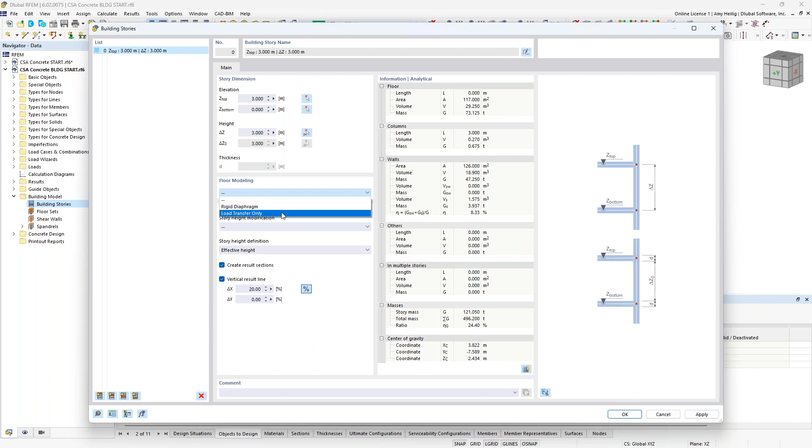We also have the floor modeling drop-down option here to define a diaphragm. Now, if I leave this as empty, we're simply going to continue utilizing the concrete surfaces that we already have modeled within our structure. Alternatively, we have the load transfer only, so you can think of this as a flexible diaphragm where we are going to distribute the loads based on the tributary area of all elements that lie within this story. And then finally, we have the rigid diaphragm, and that's what we're going to utilize for today.

Essentially, we are going to consider each one of these floor slabs with an infinitely high stiffness in the in-plane direction, and we actually extract out each one of these floor slabs to run a separate calculation with the bending moments only. So I want to continue defining these additional stories, and I can do so with this button here in the lower left-hand corner. And the program assumes that I have the same story height at each level, but of course we can make modifications to that if we need to.

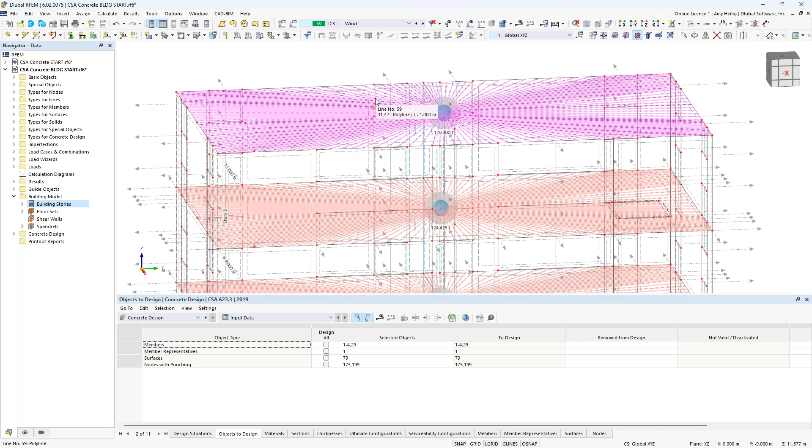When I click OK, what you will notice now is that each of these stories is now shown graphically with the dimensions and the labels shown here. You'll also see, if I go into wireframe view, a very different view of each one of these floor slabs. And we notice all of these red lines shown to us here. Well, these red lines are just representing graphically that rigid diaphragm. Essentially, we are going to tie together every single FE mesh point at this elevation with that rigid diaphragm constraint conditions.

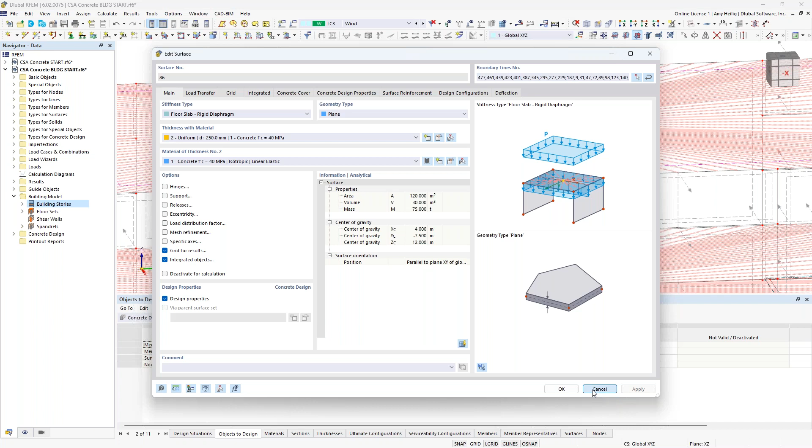Additionally, if we take a look at that concrete surface that we've defined at this level and we double click on it, the program has automatically modified the stiffness type here to a floor slab rigid diaphragm. Now we can still carry out the design according to the concrete design add-on with the checkboxes shown here. Everything is fully linked there, but you should take notice here that the stiffness type is no longer standard, but now it's of the type rigid diaphragm. If these rigid links seem to somewhat get in your way graphically, you can always turn them off with the second tab here in our navigator, where we can turn off the rigid links under the special objects.

Additionally, you'll notice a couple balls here shown in the center of these floor elements. The first is just going to be the center of mass, but also the smaller one here, if we double click, this is going to show us our floor set. With the floor set, this is going to include all of the connected surfaces, including all of those shear walls, the connected members. It will show us information specific to that particular story.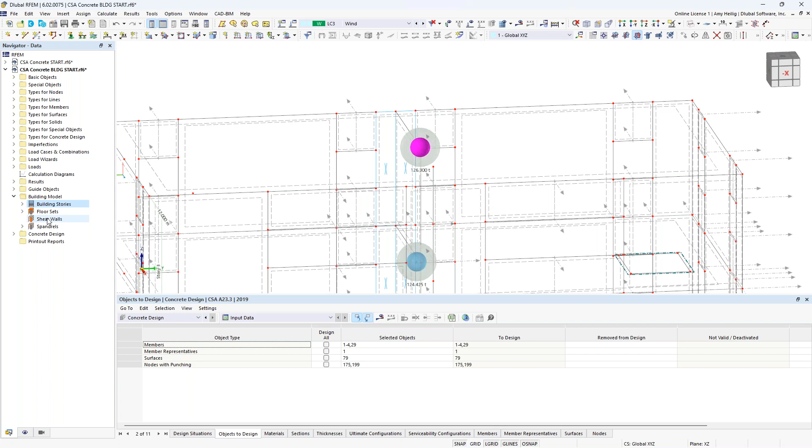So once I have defined the stories, I'm going to go back to the navigator here to define shear walls. So I'm going to turn this into a rendered view. And with the shear wall definition, I right click to create a new shear wall type. I will immediately select here a set of shear walls. So we'll choose these ones just arbitrarily over on the left-hand side. So 4 shear walls in the vertical direction. You can see those surfaces are generated here.

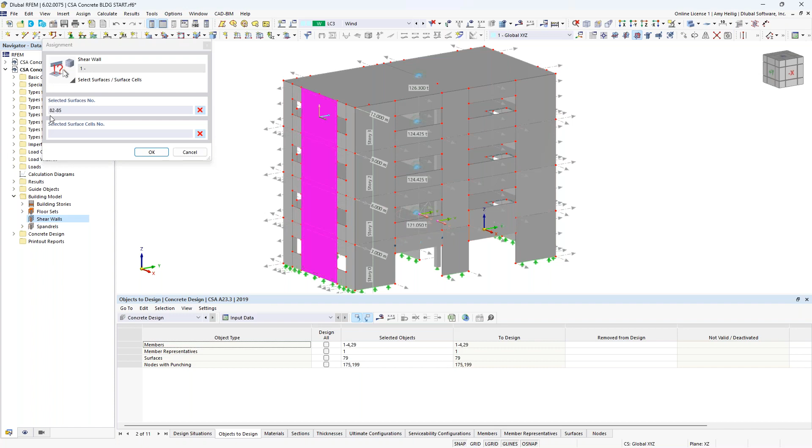What the program will do in my output is to create what we call a result beam. It's going to simplify the internal forces for these 2D surfaces and represent it as a member element. So this will make a little bit more sense once we get into the result output here from our building model add-on. But now that I have created this first set of shear walls, notice these are shown here, the cross section, I'm going to create a second set as well.

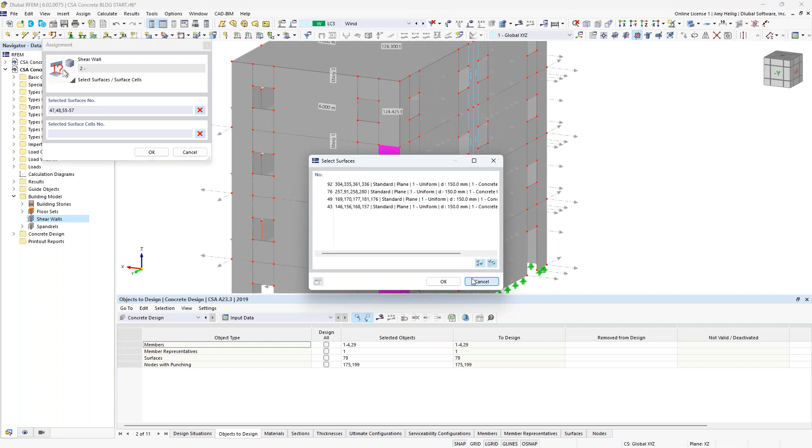The shear wall definition does not necessarily need to be in a single plane. For example, notice I'm choosing the shear walls at the corner of my structure that have a 90-degree bend in them. I select all 8 of these segments, click OK, and now the shear wall is represented by these 2 segments at a 90-degree angle.

We can take the result beam from this first set of shear walls and design the reinforcement in the concrete design add-on as a typical member. I'll show you that shortly with the spandrels. But for shear walls at a 90-degree angle, the development isn't quite ready for us to design the reinforcement that way—we can only consider one single plane right now, but this will still be helpful in the analysis output in just a minute.

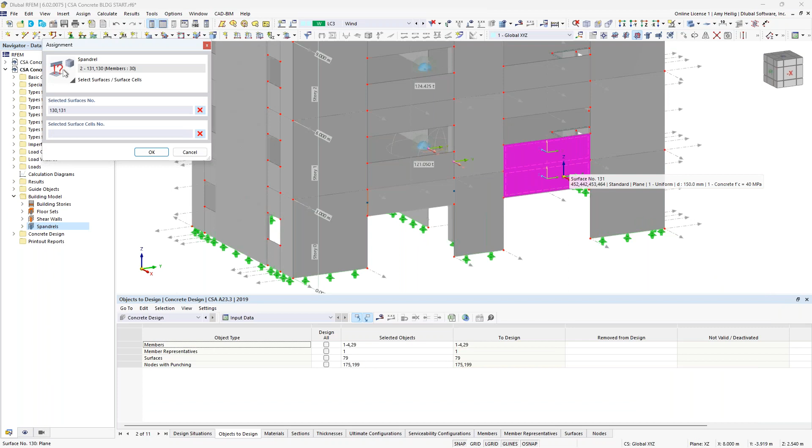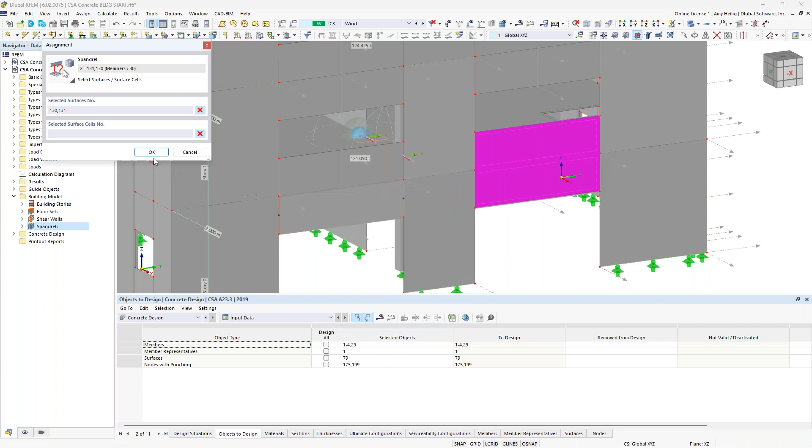Once this information is input for our shear walls, we want to do the same for our spandrels. I've already defined a couple of those spandrel definitions. We'll start with the first spandrel at the front of the structure, located above this larger opening. I also created a second spandrel definition by selecting these two surfaces over the larger opening. Notice I selected two surfaces—so if you have a spandrel spanning over a particular story or floor slab, that's no problem. Similar to the shear walls, we create that result beam to represent this 2D surface as a single 1D member.

Now that we have this information defined in the model, I'm going to run one of the load combinations, such as load combination number 4. We'll start the calculation. Notice the program will create a few calculations because we need to extract the rigid diaphragm for separate analysis, separate from the lateral system.

Now that the calculation is complete, let's turn into a wireframe view. The first thing to notice with the building model add-on is this first option at the top—we now have three options. We can view the main option, which shows the deformations for all wall and member elements, anything not part of that rigid diaphragm. We can think of this as the lateral system.

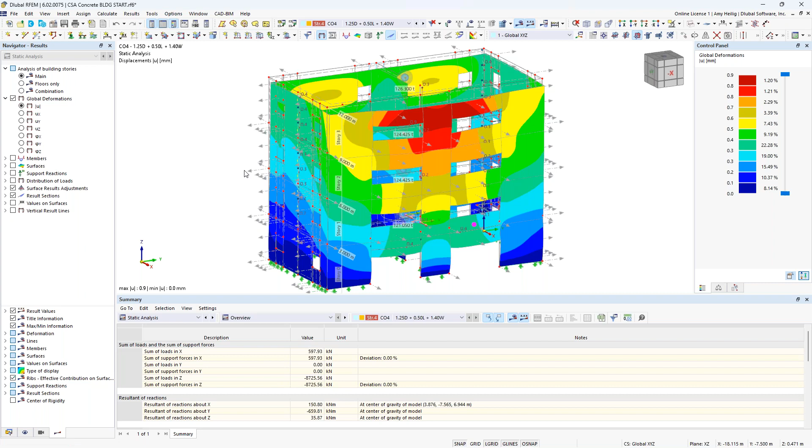We can also toggle here to floors only, so we see the results for only these 2D rigid diaphragm surfaces. And finally, we have the combination for all elements considered together.

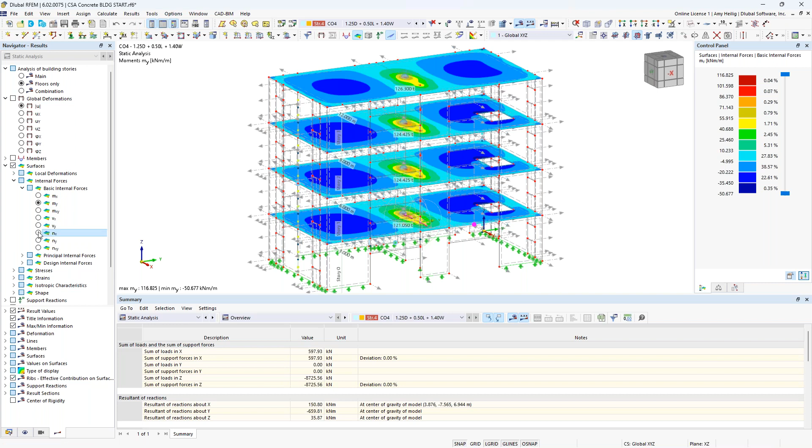Jumping to the floor elements only, not the global deformations but the surface internal forces—we again have MX and MY forces used for the concrete design, but a big difference from before is that NX and NY are now 0. That's because we have infinite stiffness in the in-plane direction of surfaces we defined with the rigid diaphragm definition type.

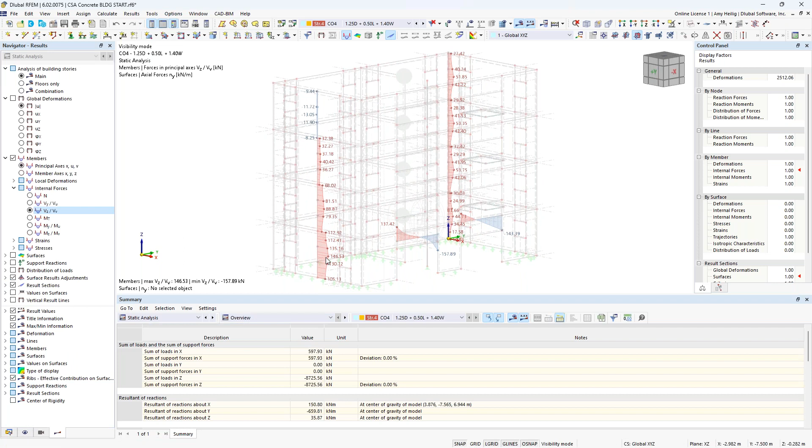Jumping to the additional elements other than our floor slabs, I want to point out the member internal forces here—what we call result beams. We'll activate, under our members, the members by type only as result beams and turn those on. What you'll see is the program summing up internal forces for these 2D surfaces and representing it as a single 1D member element.

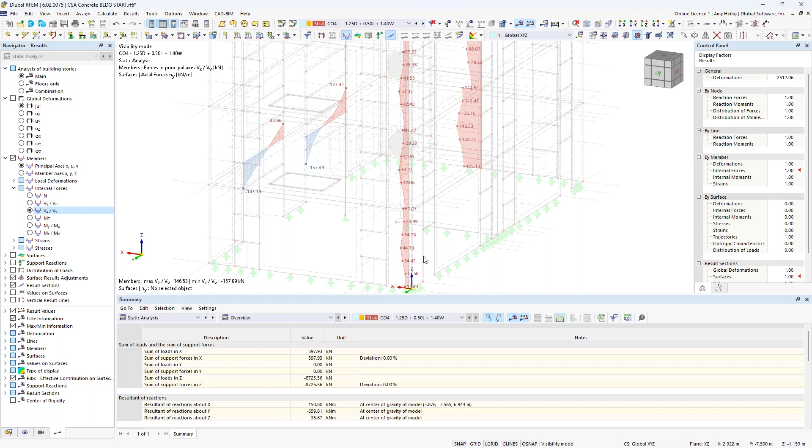Now we can view information such as shear forces or bending moments for these shear walls, axial forces, whatever it may be. Remember we defined those shear walls at the 90-degree angle at the corner—we still have a result beam summing up the internal forces for both segments, regardless of whether they're in the same plane.

Same concept for our spandrels—we're summing up internal forces for this single surface on the left, but both surfaces are summed up and represented by a one-dimensional member. We can view information like bending moments.

With this information, we can take these result beams into the concrete design add-on to carry out the design of, let's say, this spandrel as a single 1D member. If we cancel the visibility mode and turn this into wireframe view, I'll create only a visibility of this single spandrel.

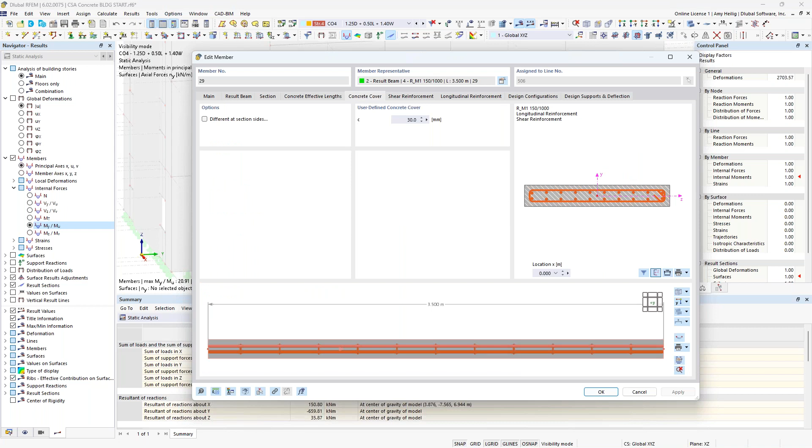I double click here and we can see that this is now represented as a result beam, overlaid on top of that 2D surface. We have all of the design properties shown here where we can specify for this spandrel, the cover, and the shear reinforcement can also be defined.

One thing to point out that may be applicable for topics like shear walls and possibly spandrels is that in the next week or two, we will release the ability to define cross ties that will be taken into consideration with the shear reinforcement as well as the design. Those cross ties can be applied to the longitudinal reinforcement, so keep an eye out for that within the next week or two.

Longitudinal reinforcement can also be defined. You can see here that I specified 4 bars in the corners, but I also utilized the rebar type line to specify 8 additional bars at the top, and we also have 8 additional bars at the bottom, designing this spandrel now as a deep beam.

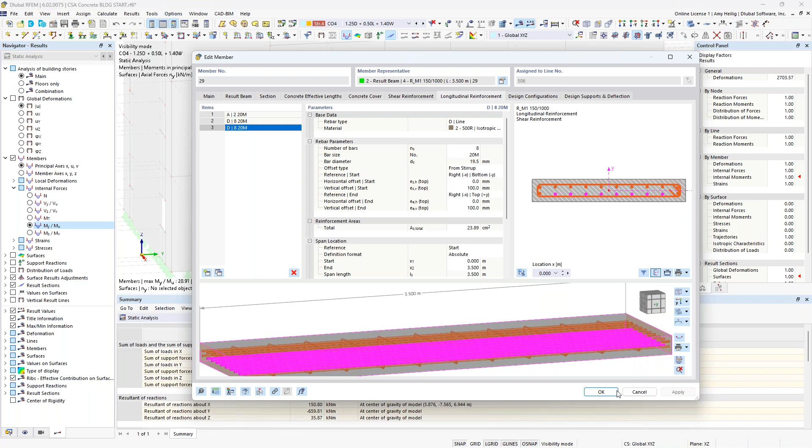Finally, under the concrete design add-on, now that we have input the reinforcement for this result beam, we will also select it here under the objects to design.

Just to quickly show you exactly what the calculation looks like in the last couple minutes, we'll go ahead and cycle through these load combinations. Notice it will take just a minute or so longer simply because we have those rigid diaphragm definition types that we need to extract out and do the separate calculation for those 2D elements.

Again, running back through the serviceability calculations here for that effective moment of inertia for all of the relevant objects that we have designed, and finally applying the CSA load combinations with the output as we see here with the progress bar. So once this information is complete, everything we have seen up until this point is the same.

The only thing I wanted to point out here is that we want to jump to the design ratios on the members, and we see that this member here is designed as we would any other particular member within the model. So we can view the design check details for this result beam, but overall, just treating this spandrel like a deep beam or a simplified beam to carry out the reinforcement design according to the CSA standard.